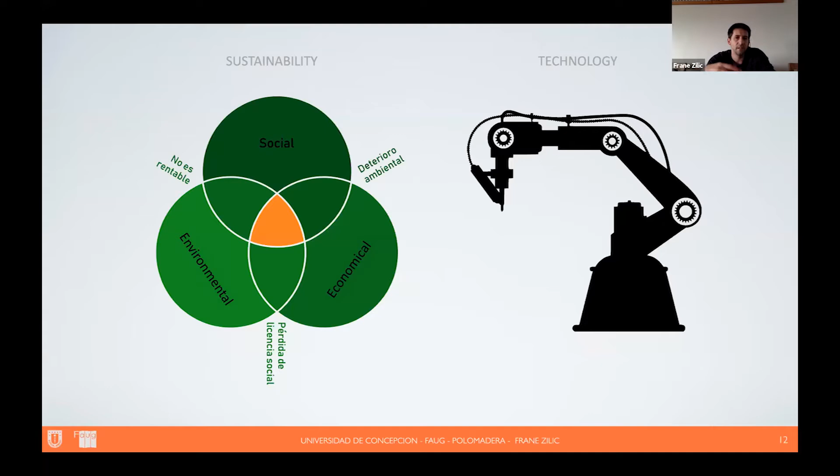Of course, you can find many aspects that are today influencing the architecture project, but I think arguably the most important ones today are sustainability and technology — two strong forces that are shaping how we deal with the project. Sustainability is understood as something that needs to take care of social, environmental, and economical aspects at the same time.

So if we were to analyze construction today by sustainability standards, and if we draw some sort of target, well, construction is not even hitting the target. It's not sustainable by any measure. Whatever you want to choose as a measure of sustainability, construction right now is in big, big trouble.

Just a few facts about construction — this would take a longer presentation, but maybe a few facts: 34% of all garbage generated in the world is from construction. Construction alone is more polluting than mining. Buildings are responsible for 39% of CO2 that is emitted to the air.

We are far more responsible for what is happening than transportation or other industries. And of course, you can apply that to safety, to whatever you want to choose as a measure of sustainability — construction does not hit the target.

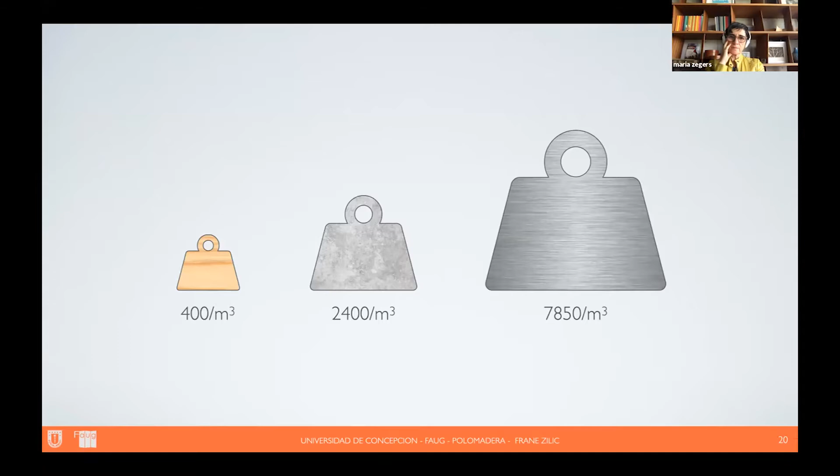That may be due to the fact that it's lighter, so it's easier to transport, easier to machine. But also because it has a strength to weight ratio that is really, really interesting. It's far better than concrete, and it's very similar to steel, depending on the kind of strength you're requiring.

And the type of timber, you can achieve something similar to steel. What is the technological context in which we are moving? In the end, it's about knowing if timber is compatible with that.

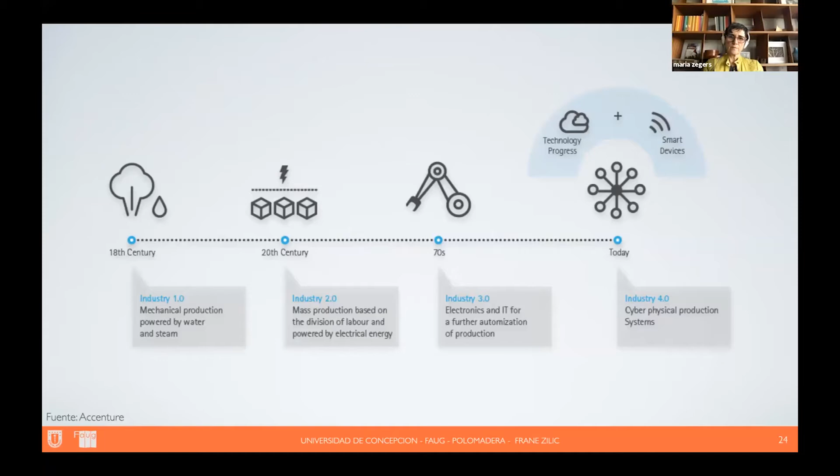When you look at the technological context, you will find a description that involves industrial revolutions. Maybe you've heard of it or not, but we are in the midst of the fourth industrial revolution. The first one was steam, the second was electricity, then electronics, and now we are in cyber-physical systems, part cyber, part physical, and you get this mixture. It's interesting, I think it's something very relevant to architecture.

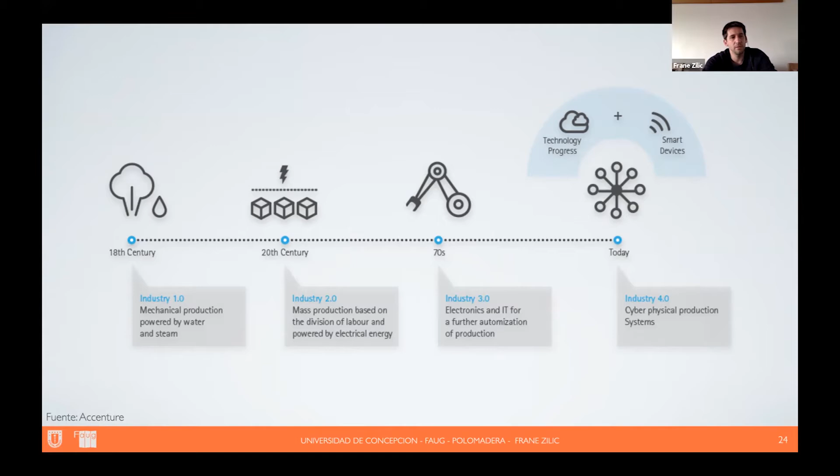Why not? But I think for us, in terms of architecture, there's another classification of revolutions, of understanding how technology is progressing, that is maybe more intuitive: the manufacturing revolutions.

Then you have the first manufacturing revolution, and that is we build a tool. With that diversity of tools you can think of, we can produce different results. So now it's not just the hand. Now we have something that can shape and affect the material, and it has progressed into some absolutely advanced and awesome tools, ones that are available and constructed today with the most advanced machining processes and digital design and whatever you want to include in that.

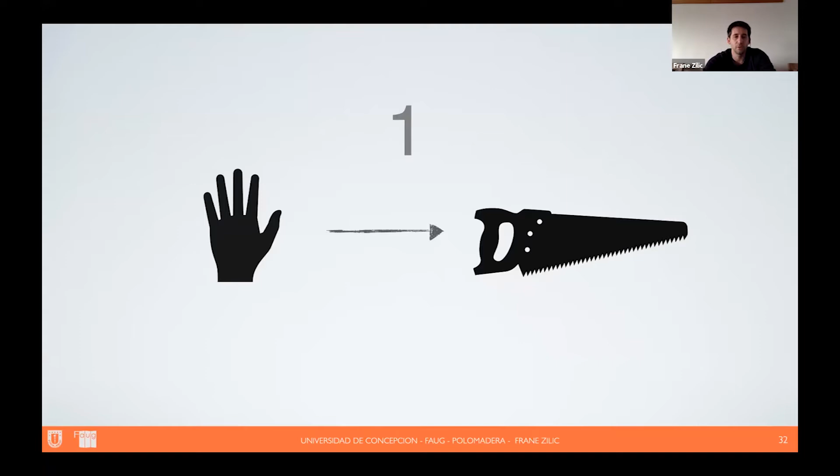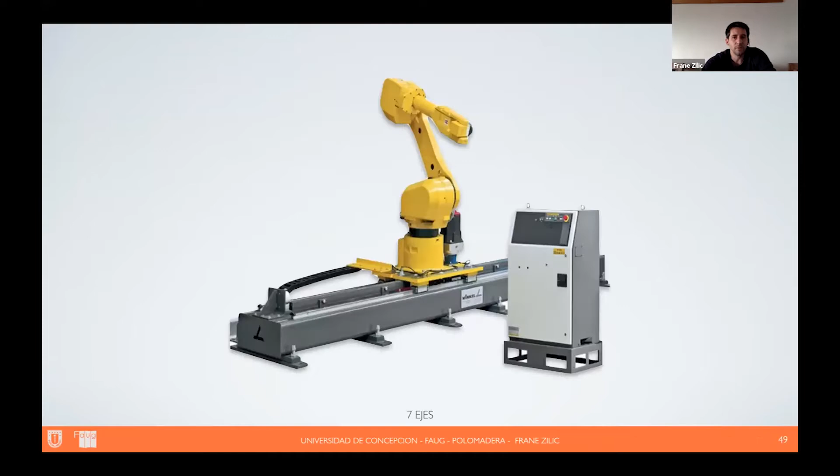This is a 6-axis CNC, then 7-axis, and you can add whatever you want. You can do all sorts of configurations. This is what is present at the ETH in Zurich.

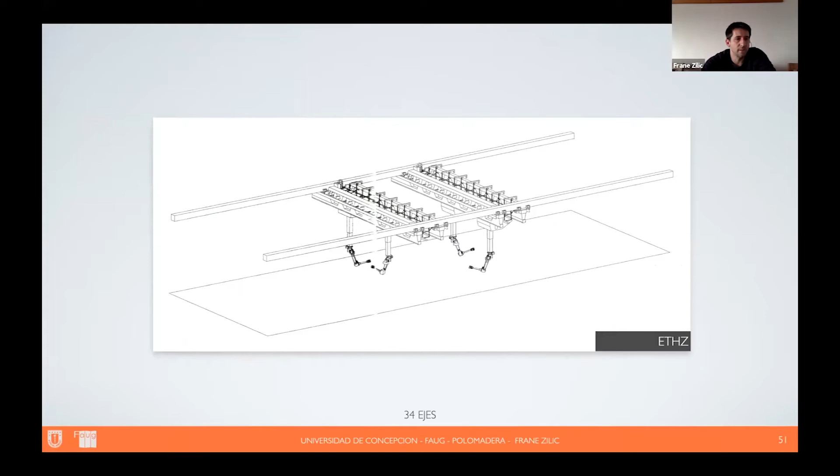Just to understand the system, you have different parts of the CNC. You have a locator, which will find any point, or actually an effector in space, and then an actuator that can do whatever you want. So at the end of it, as an end effector, you can put whatever you want. It doesn't really matter.

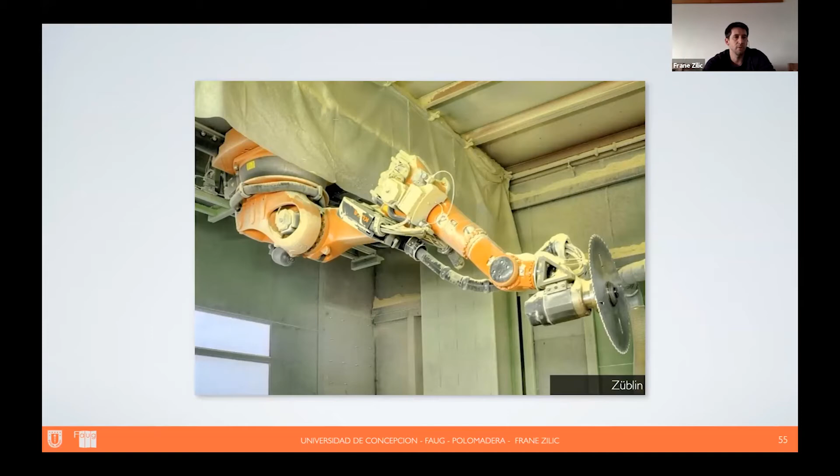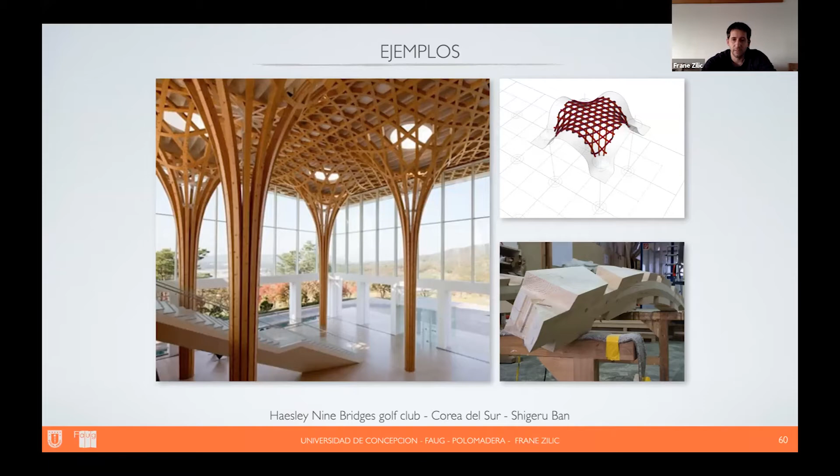And you can produce this kind of architecture. So this is actually very coherent with the technology that is at hand today. In some places in the world, of course, this is not really global. And you can see that this kind of architecture is really what expresses or deals with the most advanced technology available today.

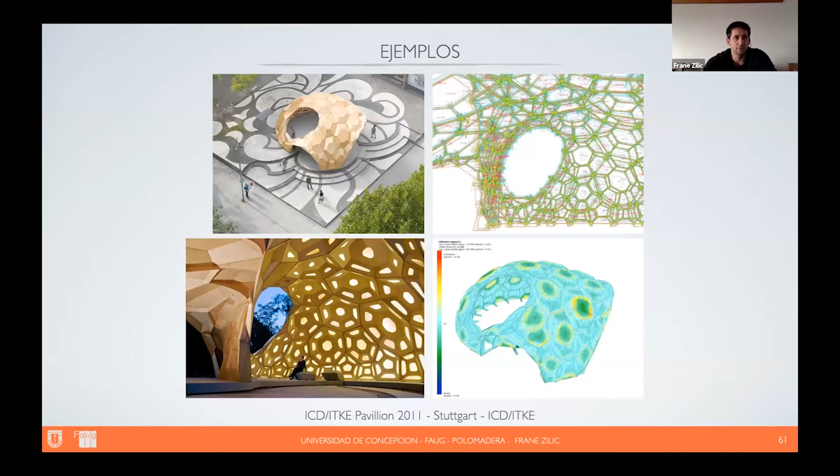These are different examples of very visible complexity, because you just see the different shapes and understand that it is something different. But actually, that kind of technology is also what enables this kind of architecture. So buildings of 10, 14, or 18 stories in timber are not really possible without CNC, without that precision of machining under the millimeter.

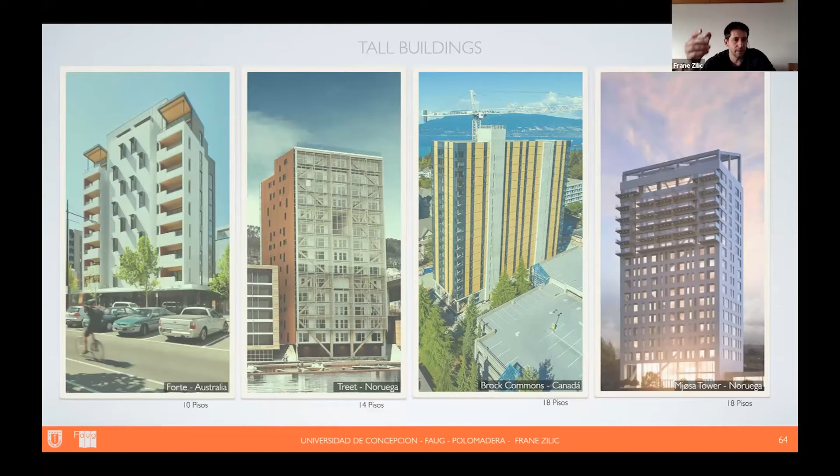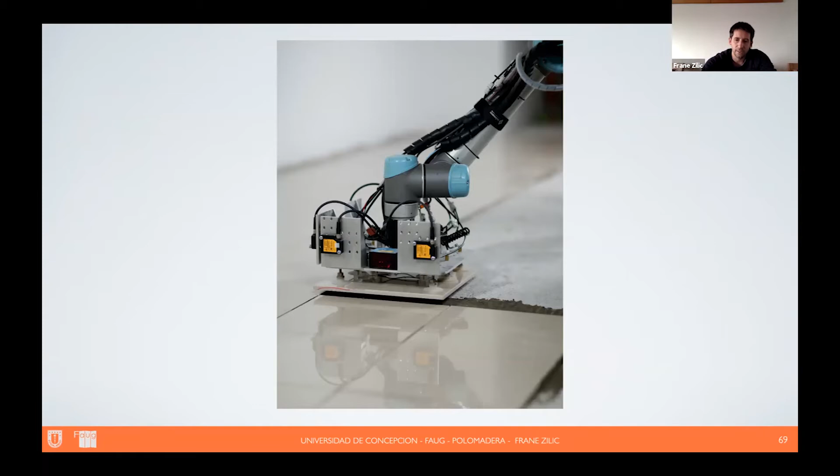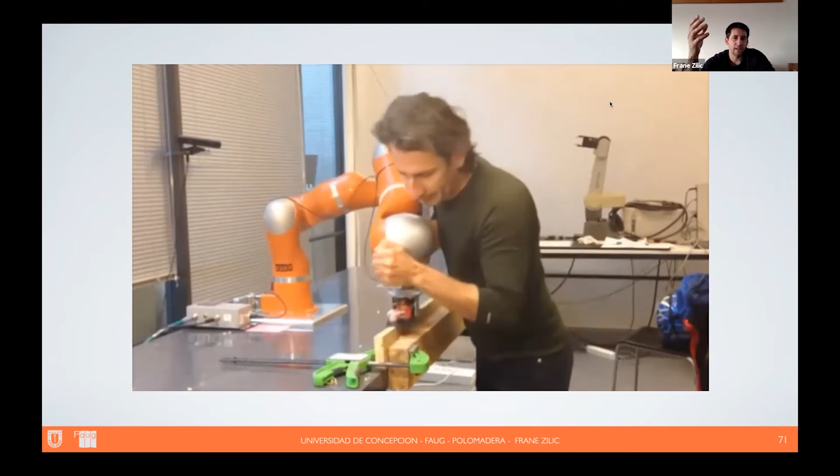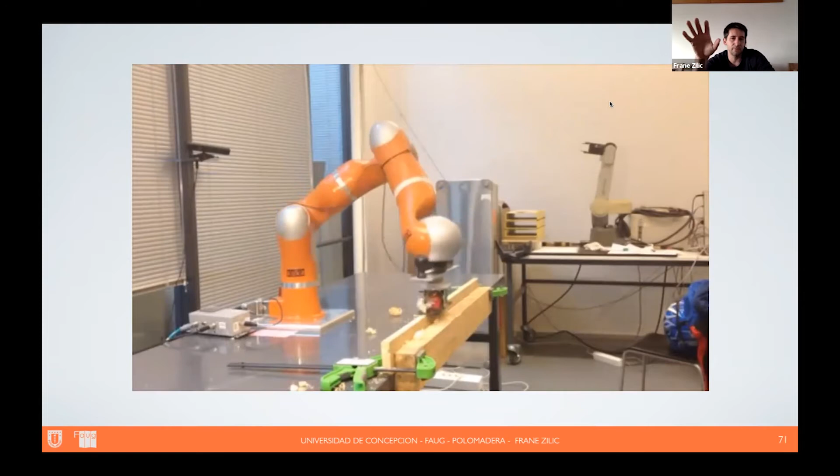And you can pour a beer, or do something like this, which wouldn't be possible without force feedback. So the machine knows how much force to apply. The second time it goes around, it applies the same pressure. It's not just repeating in the void the same motion it was shaping before—it's really a different kind of technology.

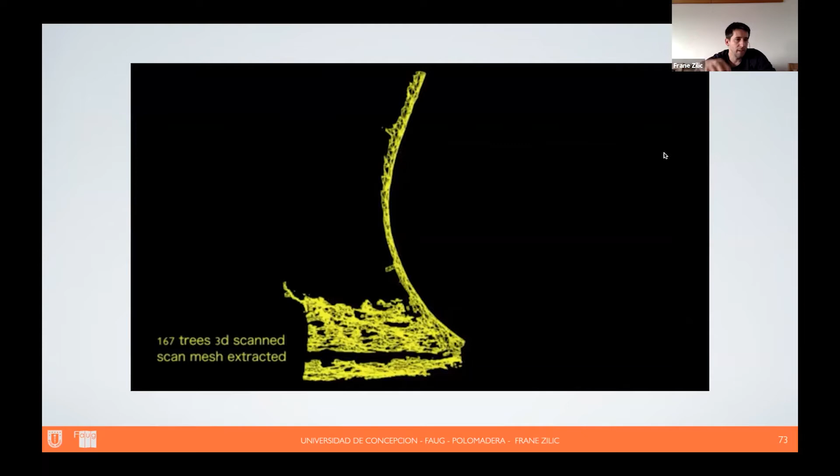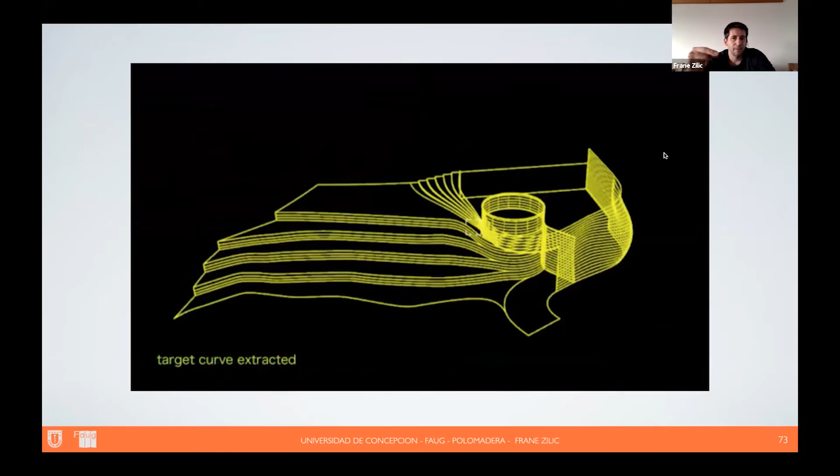In some way, this was also applied in this case at the AA in London, at Hooke Park, where they scanned hundreds of trees—167 trees—and obtained a curve along the axis of each tree, because those trees were growing on a hillside and were bent. So they have these profiles, and they know the geometry they want to achieve. They can feed in the geometry they want, with different sizes of trees, and the algorithm will find the best match to that curve, store it, and continue trying all the different trees needed to eventually achieve that shape.

So you only go and cut the trees you need for that specific curve you're designing. There's a loop—it's not just that I'm designing some shape; there's information coming back as I scan the trees. Of course the process so far is really slow, but there's that loop, and that's part of the fourth revolution, in which our senses are being replaced by external sensors.

And it's hard to understand what kind of architecture comes out of it, because we see different shapes, but we don't see the process that is involved in it.

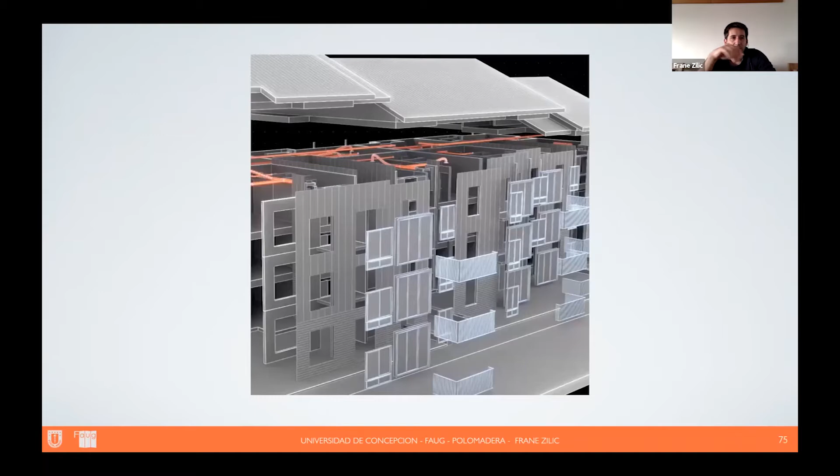I think maybe one of the most advanced or interesting examples is what is happening in the construction industry with companies like Katerra in the US. They are understanding construction as you would understand a car. Actually they're coming from Silicon Valley, and they're applying that vertical integration in the construction sector, dealing with the complexity of the system in a much more efficient way, because they're aligning all the interests of the developers, architects, contractors, everybody, the engineers, the subcontractors, the suppliers, everyone integrated in one chain.

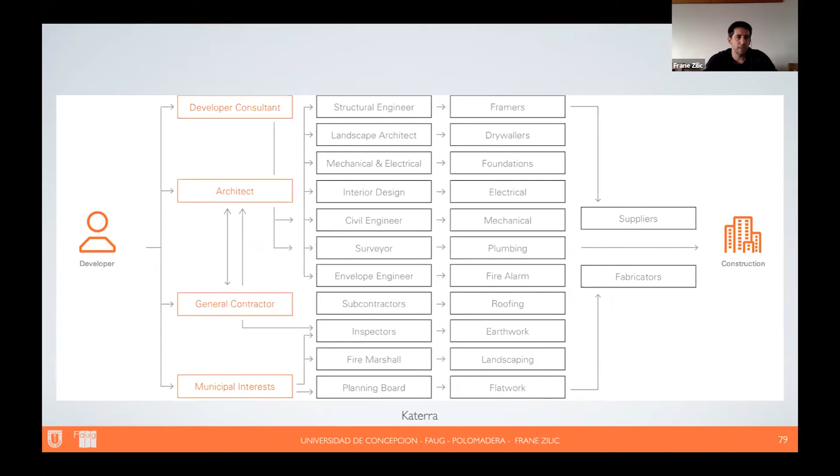And so you just skip the complexity of all the different interests of all the parts that are trying to pull the construction towards their own goals, making the whole process very inefficient. And that is only possible because there is a technology platform that aligns everything. So that is a very hidden consequence of this kind of fourth revolution, that you can deal with complexity in a way that it wasn't before.

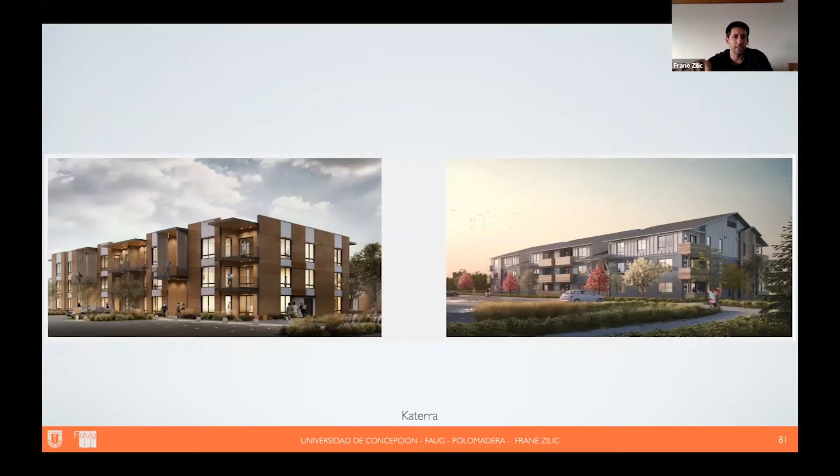You can have a platform in which you can design the building on the right or the building on the left and have the prefabrication done in a matter of a couple of months, and you have a quotation in a week. Even if the designs seem or look very different, it's really the same thing, and the manufacturing process can adapt to that.

And this availability now of these tools, the tools that we have today - so we need to understand what we want to do with it. We want to do a repetition, or we want to achieve a diversity, or even better, we can now understand that the client is a very unique person.

So at least one problem we have here in Chile is that the construction industry deals a lot with repetition of a very huge amount of houses all the same, and how we can use technology to diversify, to understand that the client is somebody that needs to be taken care of individually, is quite a challenge, but it starts to be possible.

So it's moving away from Henry Ford, in which you have only one variation, and you move to something like the Fiat 500 - you can find it in 500,000 combinations. And so this is not industrialized architecture anymore. It's not about that, we moved away from it. We are much more than 100 years away from Henry Ford, and architecture is still looking like this.

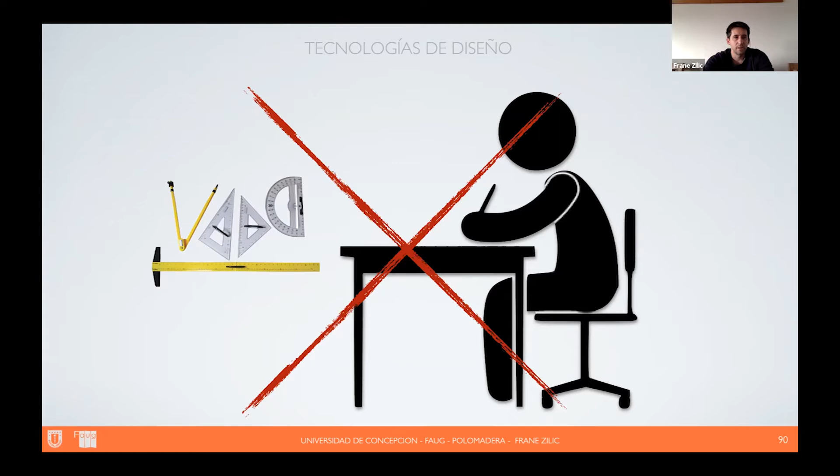So sadly, it's no longer possible to design by hand. Of course, you can have your sketch, you need to have your sketchbook on your desk, but that's not possible by hand, it's not possible by CAD. It's not possible to deal with that complexity with a huge amount of people designing a lot of pieces, all with their own mind and complexity. You need to program, if you want to harness the computational power that is present today in your desktop, then you need to program. That probably today is some sort of graphical language like Grasshopper.

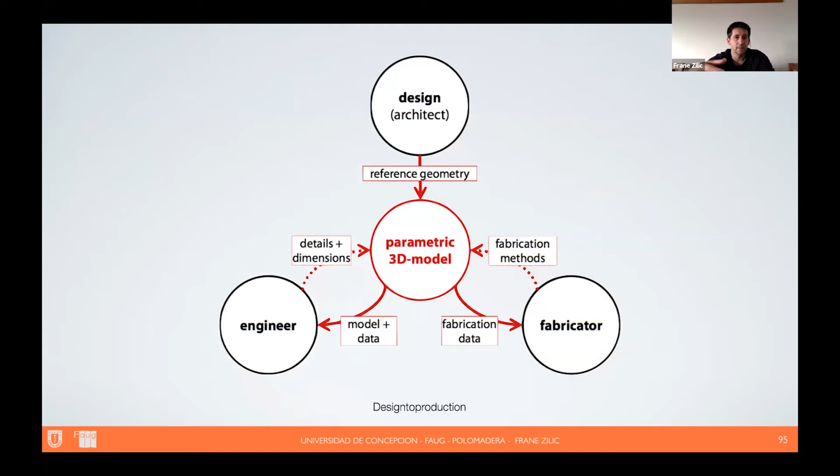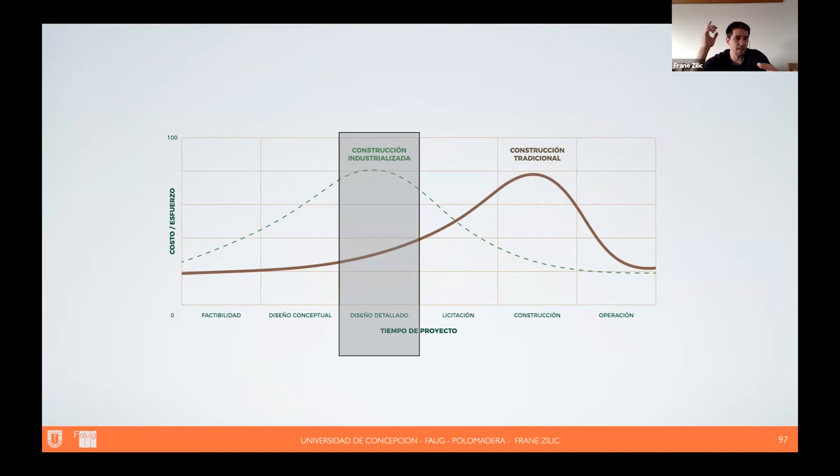And you need to understand how to communicate with engineers, with fabricators, and how you can translate that data. You need to be proficient in that kind of teams, and you will move traditional construction to an industrial construction. It's not that it takes a shorter amount of time, but you can do changes when they really are easy to change. You change in the design phase, not in the construction phase, as it was before.

So you need to understand that 2D drawings are okay, it's a way of representation, but it's not a way to work anymore. You need to move to a detailed 3D model in order to improve construction. Construction is really, really bad.

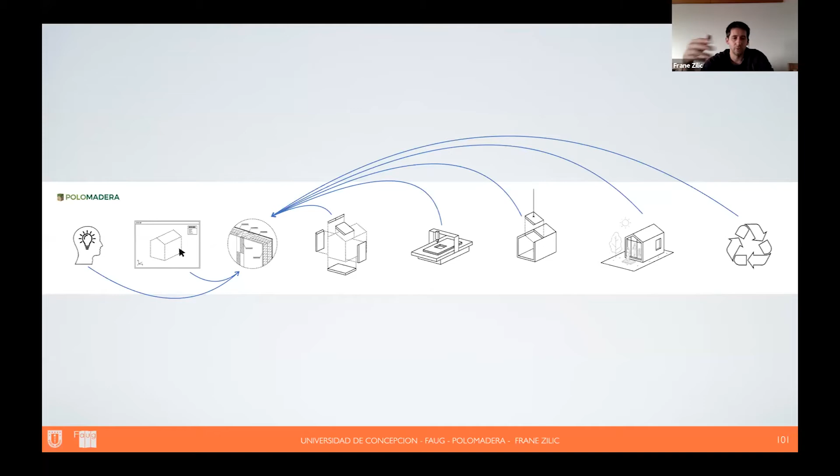That 3D model will have everything detailed, and in order to improve construction, somebody - I don't know who, it will be in a workflow that you will find in the United States - somebody will have to take care of the detailing. That's the most important part, at least to me. I think that is when you will condensate everything: the looks and the aesthetics that you want, the cost, the manufacturing, the building and the use of the building, and then the end of life of the building. Everything comes down to that detail. So if you allow it, then the detail will provide decent work for that building, so that it can function.

So if that is the context, is timber really ready for that advanced manufacturing? Of course we have the highest end of technology, and timber seems a material that is really old. So we need to understand this question in order to answer it.

We have three basic kinds of manufacturing technologies. You have additive technologies, you've heard of 3D printing and that sort of stuff. Well, timber has also had an additive capacity for a long time. We can add different pieces and make a bigger piece that is even better than the smaller parts.

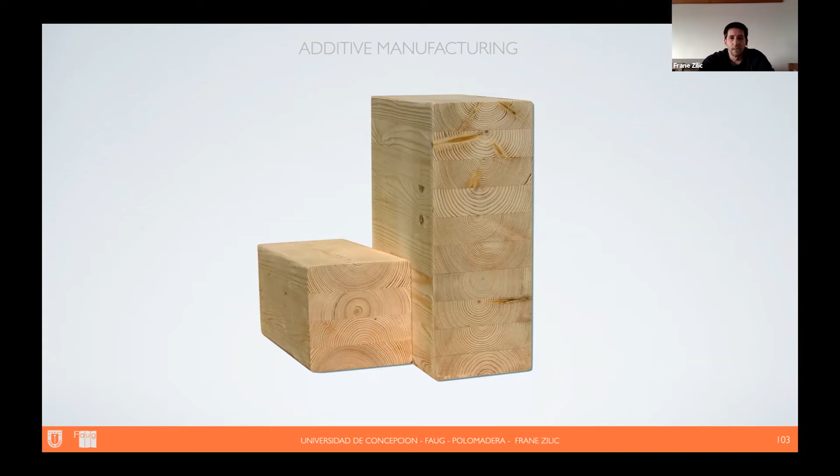You can also have formative manufacturing, which means that you can bend it, so you can do different kinds of shapes. And you can have subtractive manufacturing, and you can mill it to a precision that no other material can, under half a millimeter. I don't know how long that is in inches, but it's really, really precise.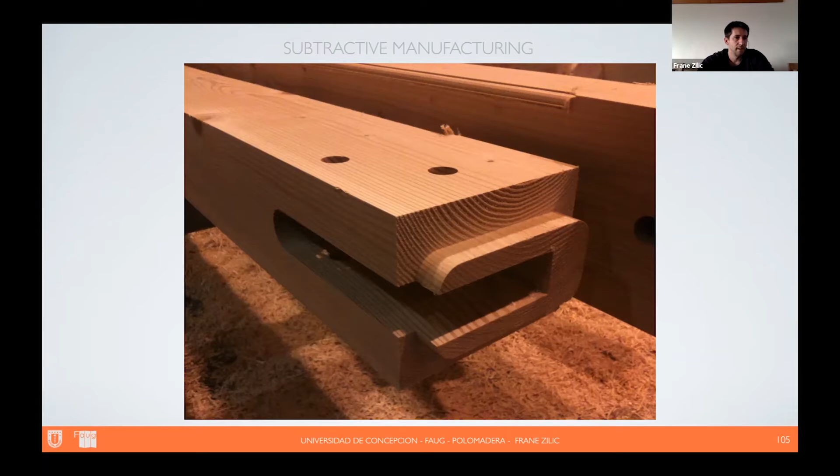There's no way you can do that with concrete or with steel. With steel you can, but then you have thermal expansion that really is a mess. And why timber? Well, because of this, you can work with it. It's really strong, but then you can machine it really easily.

And since it's that soft, you can have very big machines like this one, 2.5 meters long, and the spindle that is spinning at maybe 15,000 RPM, and it should induce a lot of vibration. But since wood is soft, you can get away with it. You can have that kind of manufacturing flexibility with timber that you couldn't have with steel.

Here is an example of what is a 5-axis milling machine for a small piece of steel. You see how robust it needs to be in order to have that level of precision. In timber, it's not really that. It's much easier.

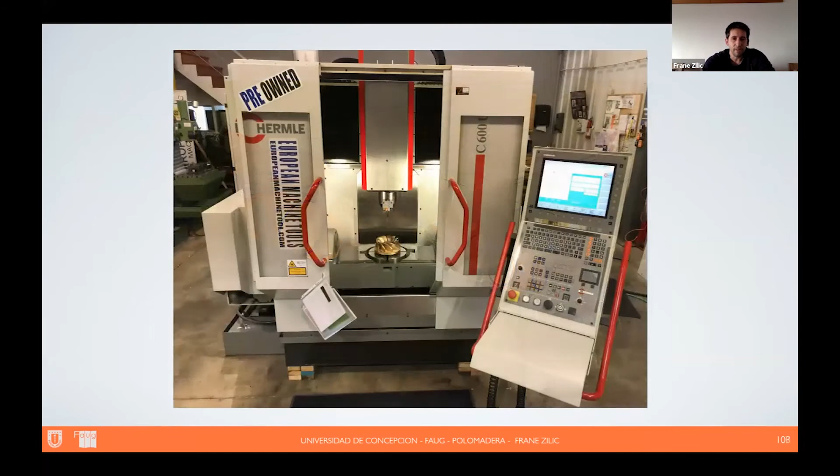And so, yes, robots love timber. It's really compatible, it's the best material for it. And you can do whatever you want with it, whatever shapes you want. You have shells, or you have some sort of ribs, or planar structures.

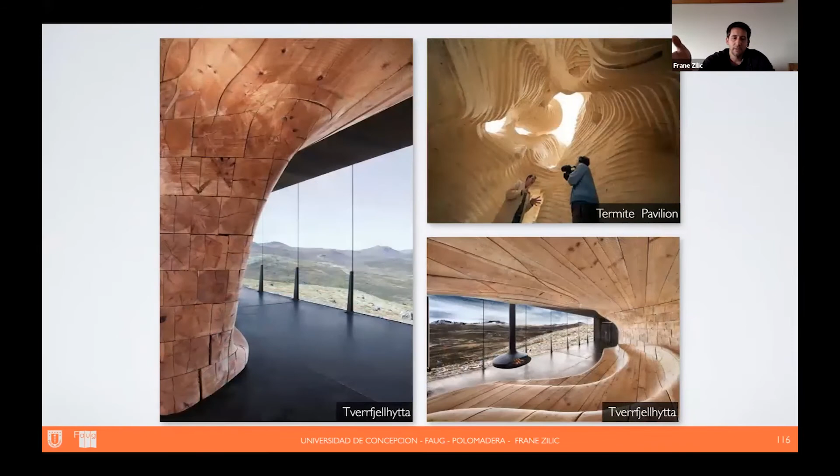You can have grid shells, you can have whatever spatial structures, reciprocal or lamella structures. You can have even solid ones like these that are really sculpted into timber. And again, not just the shiny part of strange and curvy shapes, but also that kind of precision and machining and lightness can allow for this.

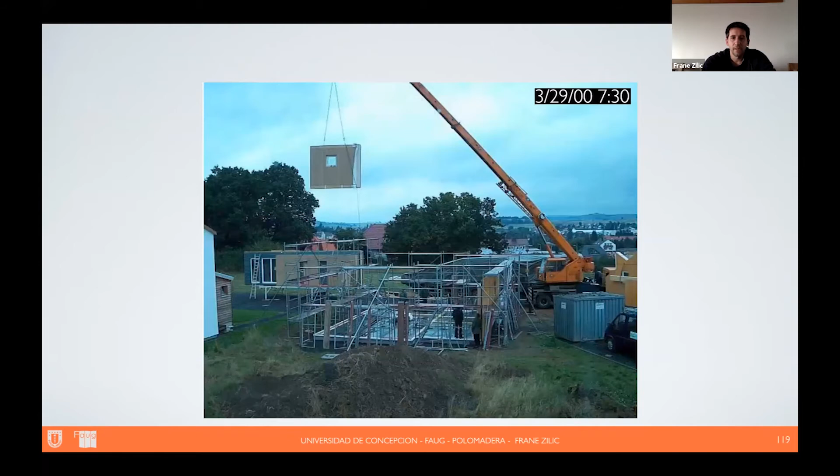This is 7 a.m. in the morning, and this is 8 p.m. the same day.

Of course, the other examples are shiny, but I think this one is very interesting. Good luck doing that with any other material and reducing risks and weight and cost.

So in conclusion, to finish my part, timber is actually very compatible with technology, but also with the world, with what we need as a response to a sustainable construction. Of course, we need to understand much more than we usually do in architecture. We need to understand the material, the construction processes, a little bit of engineering, and then you can do amazing stuff.

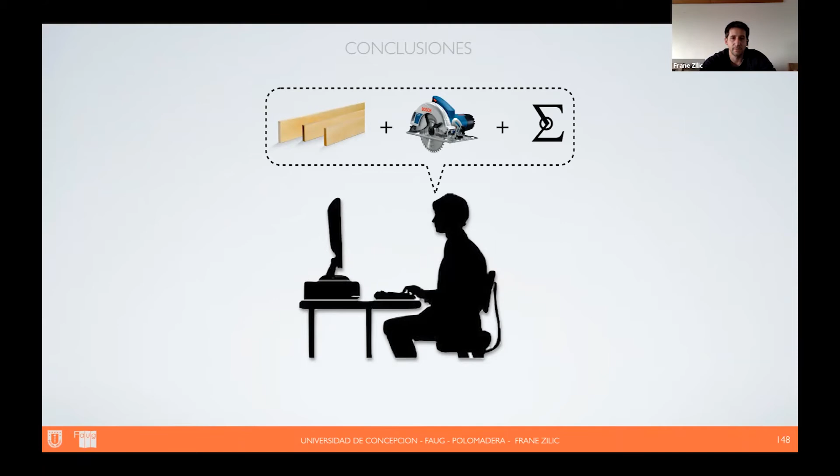You need to understand how to collaborate and to integrate today to deal with that kind of information, and how to be compatible with what is needed for a complex solution to a complex problem.

Gracias. That one I didn't translate. I think you're going to understand.

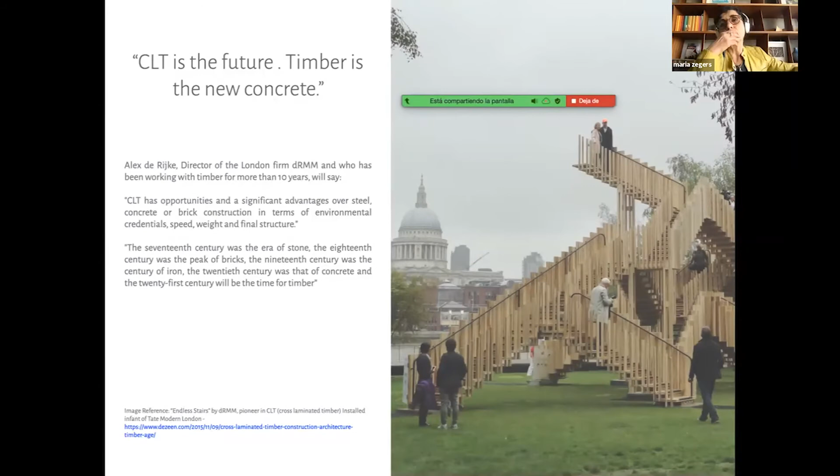And the reason for that, as Frane was saying, is all these environmental things. And this is another exploration that Michael Green, with Equilibrium Consulting and Metsawood, did, exploring if the big buildings of the 20th century could have been done in another material, because each material has its architects, its iconic architecture, no?

It's really interesting to have these super interesting buildings like the Empire State, as if it could have been done in wood or in timber. He makes all this exploration, and it's really fascinating that we can make this icon in other materials like timber, that in our minds we would think was really impossible.

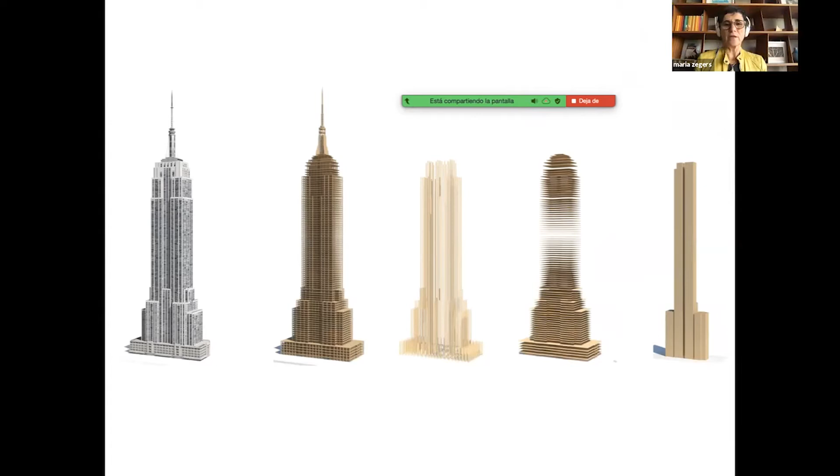And then I met this architect, Andrew Waugh. He's also an English architect, and he has been working with timber for a long time. I met him in 2018 in Brazil, at a conference for building with timber. I learned a lot from him, and he says timber is the future, as everybody does.

He has this project called Multiply, which was a competition entry for the Victoria and Albert Museum. It's beautiful to see this timber piece in this really traditional architecture, and he explains the possibilities that timber gives—the main ambition of the project is the policy debate about environmental challenges that can be addressed through innovative and affordable construction.

We're in a time of great crisis, both in terms of housing and CO2 emissions. We believe that building with versatile and sustainable materials such as American tulip wood constitutes an important contribution to solving these problems. This is Andrew Waugh's position, and it's something we are trying to put on top of this discussion today.

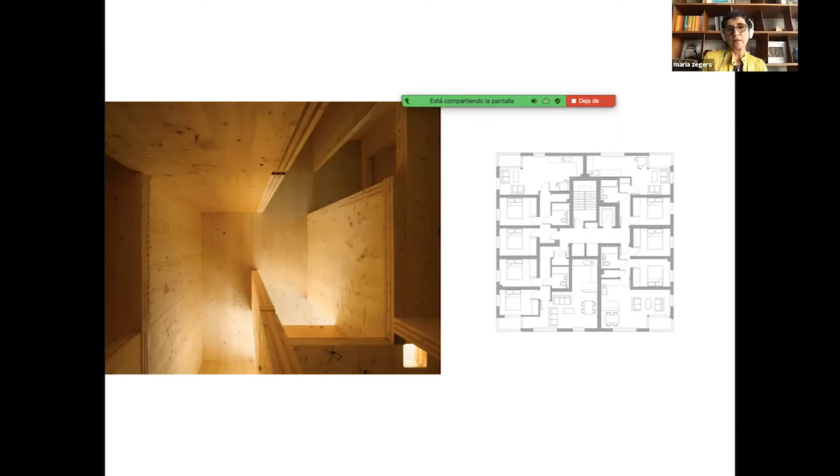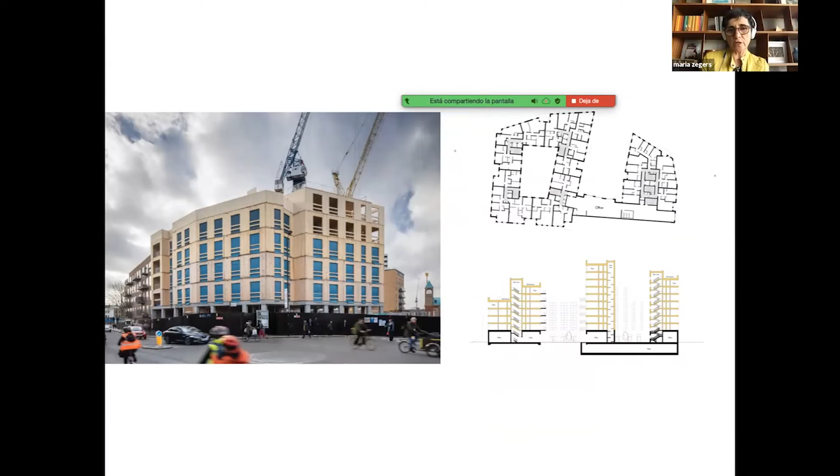And his house, where he made a really interesting challenge to the structural capabilities of the material, by making that space for work in a double space with no beams. He explains it better than me, but the interesting thing is that when you want to investigate with a material, you start pulling the limits to new solutions, and that's what I think is really interesting.

That's what we've been doing with Thorsten for this competition, which we hope we're going to win—I think that we should. You see this double space, which is open and doesn't have any beam, and the building is really beautiful. It's his house; on top are houses, and on the bottom there are little stores.

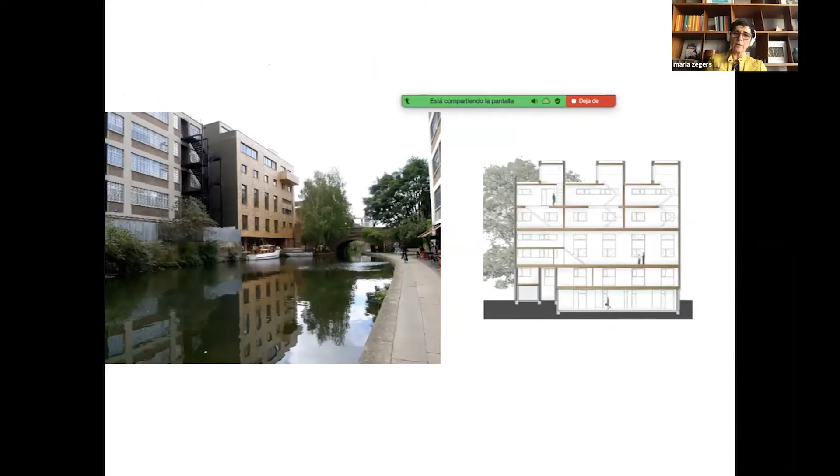This is on one of the canals in London. There is Andrew Waugh, when I met him in Brazil, and then we worked together on a competition. There's Frane too, and Francesca, an Italian architect who works with us, and also a German architect. So we were a multidisciplinary, multi-nations team, and this was our project, which was really beautiful.

It was a whole timber project for a new timber headquarters, and all these roofs were for walking on top of them, connecting with the hills around. We really made an open plaza for the community, and all the spaces for working had greenery—it was like a very discrete project. It was very interesting to do this.

And then what happens with Latin America was our question. We are still in Latin America at a very initial stage of this, and with Frane we're trying to pull these limits towards a new dimension. He's making the first tall building in Chile, which has been a very big challenge, because as countries that are underdeveloped we have to be very creative, as Andrew Waugh was proposing—to use high technology but in a very low tech way.

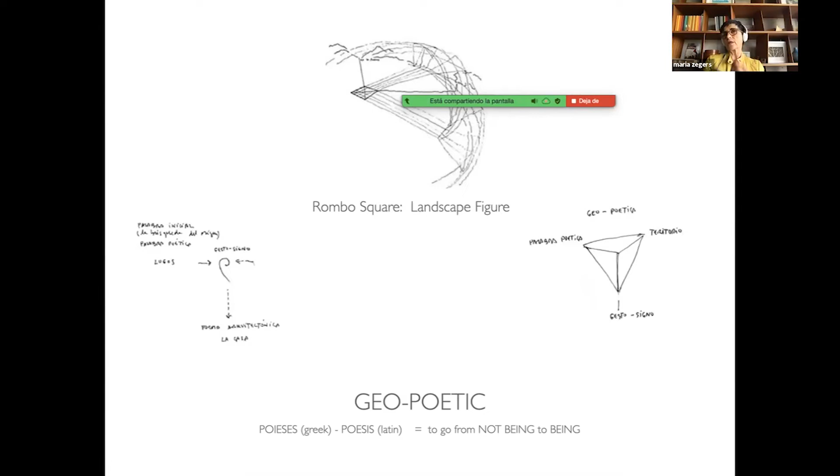So in this way, you can build new narratives over a territory.

I want to start with this family lot, which was designed in 1995. I like to show this because a family lot is like a small hotel for a family, but it has all the same way of doing things.

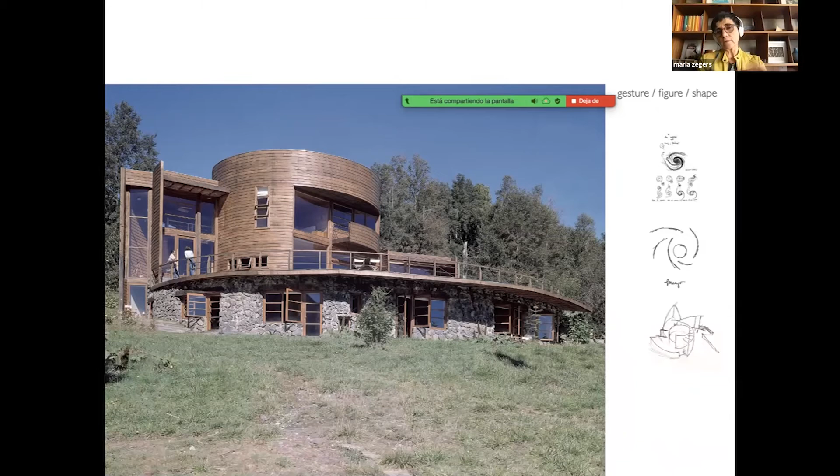I did this in the south part of Chile, in a very remote place. I decided to go round because of the poetic word, which was fire. Fire, because the place where I put this house had very recent volcanic explosions, so I thought fire was very present there. Also, like a family lot, the first order was the clan over the fire. So I thought of the family over the fire, and then the house came because of this relation.

I'm always interested in architecture that's not gravitational, but dynamic. So I thought about studying the spiral galaxy, that is the drawing of the gesture on top, and then that figure became the form.

It's really interesting because if you look at these studies of the spiral galaxy, there are little galaxies there, which is the way the nursery of galaxies starts. I did this project in 1995, and construction was finished in '97. I just made an upgrade in this same way.

What's interesting about this project is that because of the poetic word, I had to make this house really round, completely round. Everybody in Chile was telling me it's impossible to bend timber that way because all this native timber is very, very strong. So that's impossible. But I thought that when you have an idea, you can always make things go forward. So that's what happened with this house.

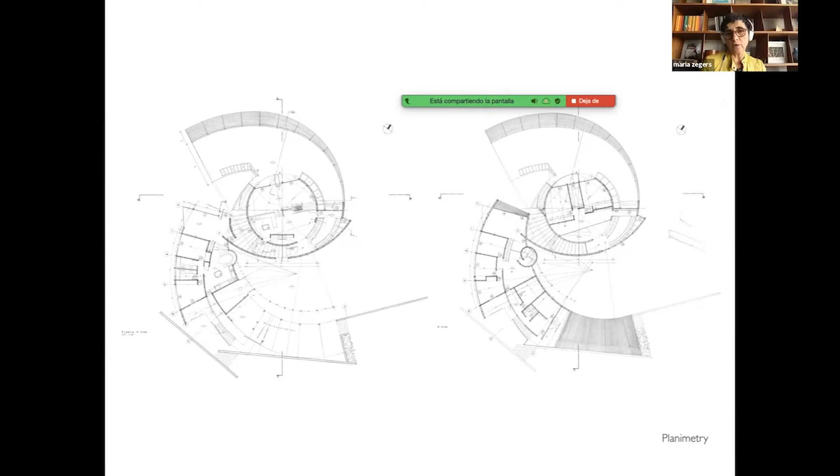In the center you have the fireplace for the family, and in the first wing you have all the couples' rooms, which can be accessed individually or through the common space. On the left wing you have what was called the children's house. So there are two houses articulated by this center.

The way we built it was with this very precarious and uncommon light timber structure. What was really interesting was that I was trying to find how to put the stone for the wall, for the concrete wall that was the support of all this.

When we were making the hole for putting in the base, we found a lot of volcanic stone right there. So that was like the confirmation of all my hypotheses with the poetic word.

Here is where you have the articulation of the two wings. I call this the wind, or the wave, that connects both spaces. You can see the entrance of the second house, and also a covered place to put wood and everything for use of the house.

I also always love stairs as sculpture, so it's always an opportunity to do a sculpture in the house. That stair was built in Santiago. It is laminated, and it was completed and sent in one piece to the place.

As I said, it's in a really remote place with a really bad road. So using all this creativity, they put this long stair on a truck with pneumatics, so it wouldn't break. So it's a lot of these little stories, you know.

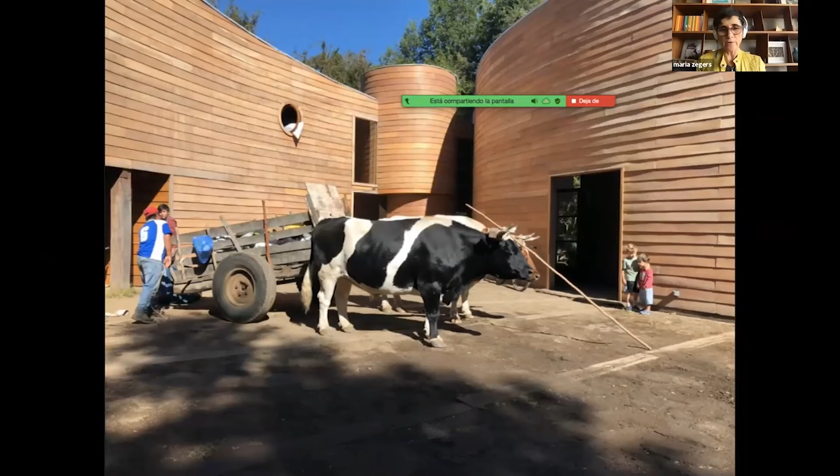And then the stairs that are connecting all these parts over the center. And then the windows on the roof that bring light into the interior spaces and also give you these vertical dimensions. And of course, this is the garbage truck in the morning. So you have this very contemporary architecture in contrast with a very vernacular way of living in the space.

And this is the new version of this project, where I did all these terraces and a second layer of using the space. On the right hand, you have the new gallery coming out, and it is a fireplace for the family again, because the family grew a lot, so they needed a bigger space. So this is the place today: on the left hand is where everybody is meeting and gathering.

And here you have the round cylinder from outside that is the connection, and it is also a bathroom inside. That's the entrance. And here's the new kitchen for the space. The afternoon.

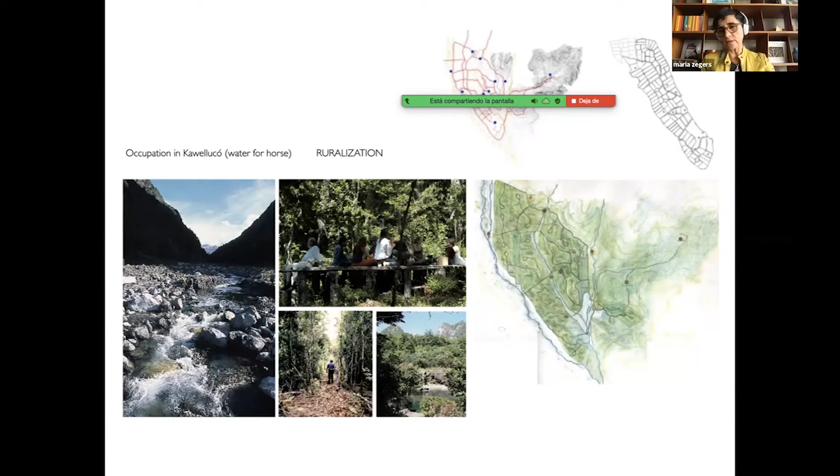And of course, I had to work on this — this is the porter's lodge. This was just an encounter of roads, but because I made that really simple structure there, I made the entrance and gave the place its shape. It's inspired by the eye of the Portes Lodge, who is coming to the place.

And it's just this wall that is ascending towards the sky, and it is connected in two parts — this is the eye of the porter's lodge. And then there was this typical barn. We have German colonies in the south part of Chile that were called by the government in the 19th century to open and colonize these lands.

And they brought all this way of doing carpentry from Germany. They were really very beautiful and good carpenters, and they taught the local people.

So there is a very iconic construction in the south. There are all these barns. So we used this barn.

I decided to leave it just as it was, and made a space for receiving the people that came to buy. Because I didn't want to over design, I just left the clean structure and made the space work to receive people. Like on the second floor, we put all these beds in an open space, which is a very indigenous way of sharing.

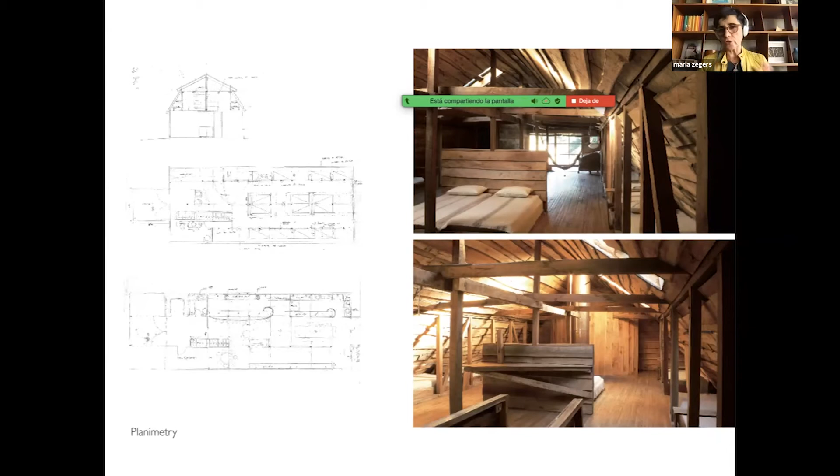And all this experience of the barn made the people that came here be invited to the place to live this experience. Because what happens when you don't over design is that you have a beautiful table, but it's not completely set up - but the setting is beautiful, delicious food, and the person is in front of you. So you have to cut all your barriers, and you just have to talk and encounter the other one.

So all the speaking that happened in this place was what made the place to be, and to develop also the architecture. So today, this firehouse is the place for the community and to do sport.

We climb the volcanoes around the space. This is us going to Mocho-Choshuenco, which is this beautiful country that we have. So this experience of the Fogón and the Casa Fogón also was what gave the architecture, as I was saying.

So I developed like 3 types of architecture. One is the galoft, which is the encounter of the galpón, which is the Chilean barn, and the loft, the American loft too. So it's a way of how you organize the program of the house in open spaces, in this vernacular contemporary architecture.

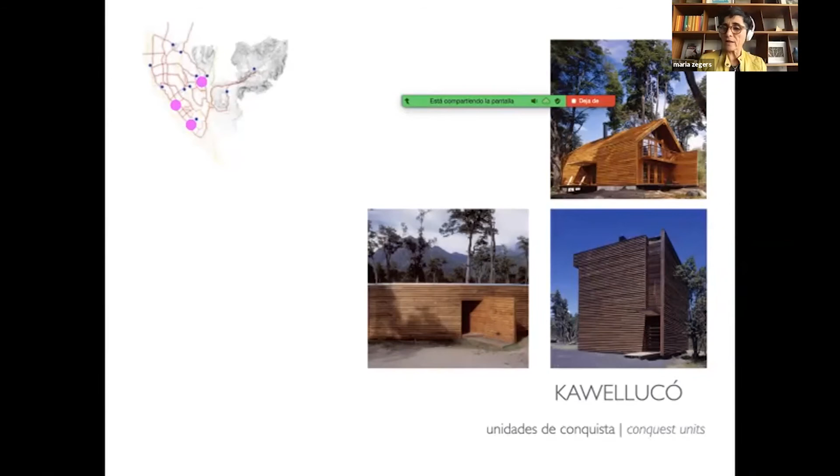I'll show, I think I have 2 of these, and this is the barn house, but this is a contemporary barn that Philip Jodidio chose as the Forest Hideaway in his last publication, Latin American Living. And it's just this fuselage of timber in the middle of the forest.

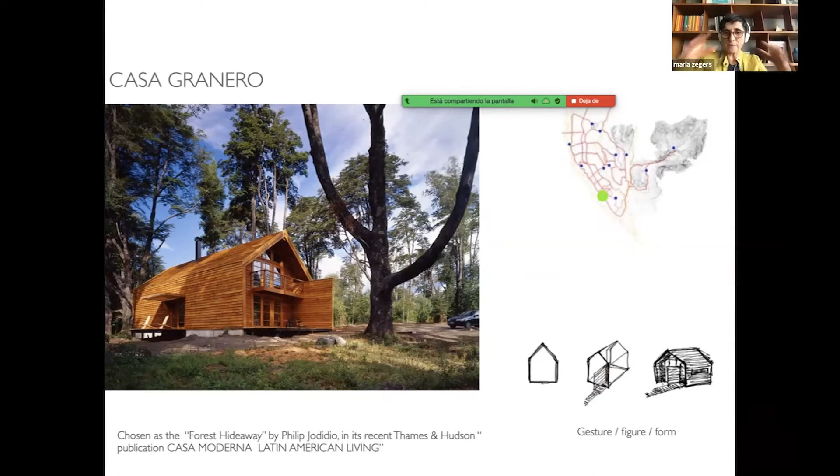And it's inspired by this - when you draw a house as a child, it's just this synthetic space that is like this tent that is protecting you. And I made this wall, which makes the entrance, also controls the climate, because you have these 2 doors, and then you go into this open space.

On the top, you have the balcony for the family. And also my original idea was that this solar protection would also be the fence for closing the house.

This is the main room, and the way the house is in the forest, with very simple movements - you articulate on one edge and go in with the wall for 1 meter, and then you have a lot of quality in the facade.

Then there were these atelier houses. This was for a Chilean painter who lived in France, and he wanted to paint, made big size paintings. So he needed a special light that came from the south, which also had the volcano view.

So that was perfect. And he asked me for a cube 9 by 9, which I suspended 40 centimeters, and I opened the edges to make the light come in. This simple cube is 9 by 9 by 9 meters.

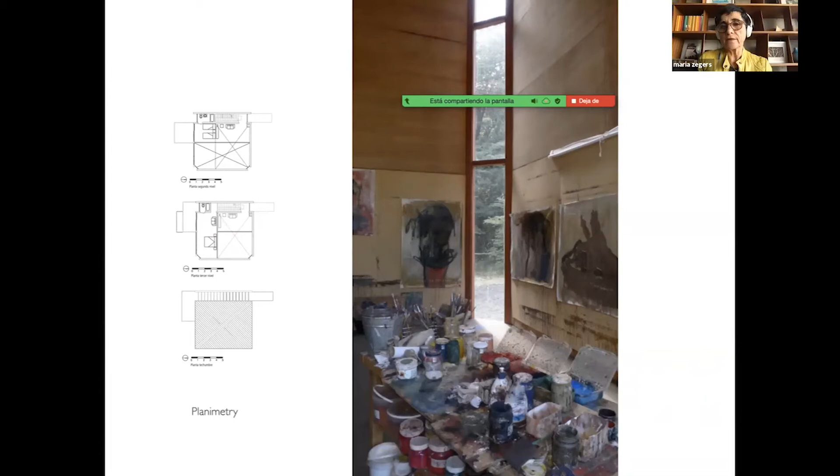I moved the wall like 2 meters, so you can have the stairs for the balconies where you have the place for the living. And sometimes you have the cube as an atelier, and other times it was the space for the family. So on the right hand, you have the kitchen and the table, and the volcano on the front.

And also this is an interesting picture, because these are the balconies for sleeping with the bathrooms. And you can see a very complex space, but it's really simple. So I like this idea that in very elemental movements, you can have so much beautiful experience in the space.

And here one of the lights in the roof is also the place where you take the water out of the roof. But because I did it with glass, it gave also a lot of - how do you say in English?

And then I call it the shell house, which is inspired by the shell of an apple - like you peel an apple and it's what is left.

And the beauty of this is the tension between the landscape - the hills made by the volcanic explosions of the volcano, and that's where the park is, that's why they couldn't cut all the trees. And this simple horizontal line tensions the space, so the landscape tensions the house, and the house tensions the landscape.

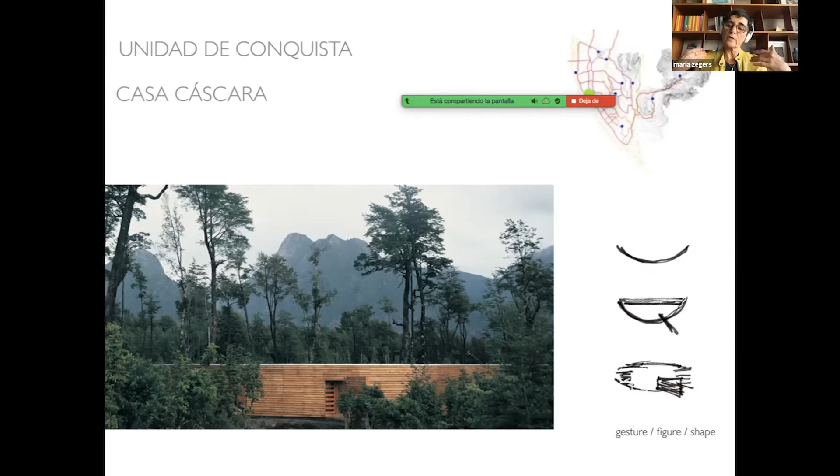And this wall is vanishing over the ends, because I have the light coming from the facade that you go in. I didn't want to cut that facade, so I made a very simple movement that vanishes towards the end and lets the light in.

Again, this strategy of the wall, making the entrance and protecting from the rain. This is the system, a 2 by 1 inches piece of wood that connects with the timber every 1 meter, giving you continuity of the wall.

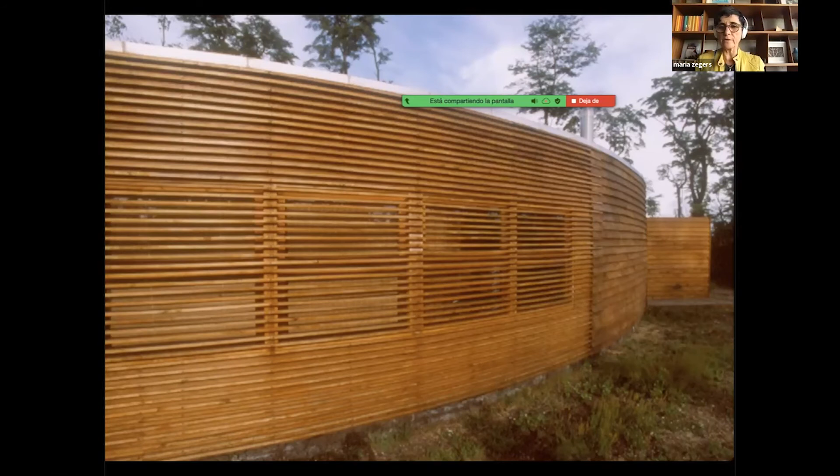And on the inside, you have this really qualified light. I'd like you to see the floor plan, which is very simple.

Now you have all this common space. On the right you have the main room, and on the left you have the 2 rooms and a bathroom. This is 100 square meters - very small, but completely good for a family to be in the space.

And also the roof has terraces. Then you have the space and the chimney - you can cover it from one side or the other. When there's only 1 or 2 people in the house, the chimney is open completely, and if you want privacy, you close it. And there's the way the wall vanishes towards the end, with these little creations of the pillars with the glass inside.

So everything is speaking about this lightness of the timber. And I did the same floor plan, but in a rectangular house.

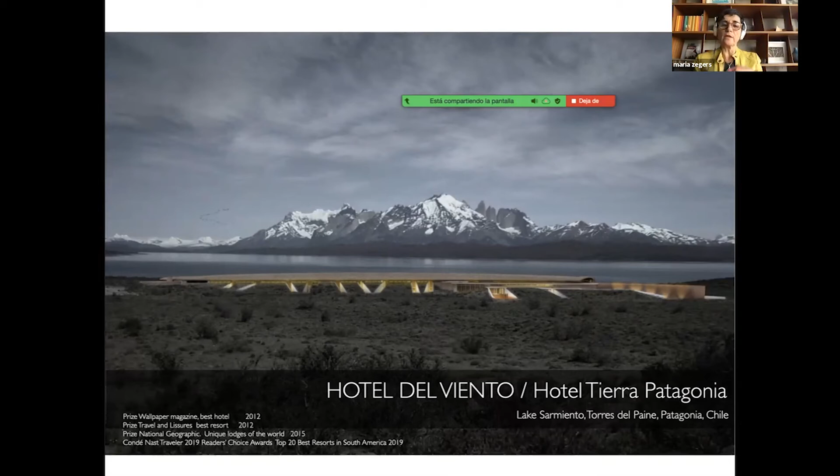So I thought the hotel was going to be one of those dunes - completely topographic, not interfering with this beauty, but still being there. So I made this fuselage that comes out from the earth and folds in itself, and by doing that, it also gives a front to the wind.

And what I imagine for the hotel, because people come here to do all these trekkings and to visit this beautiful place, so they are in general here in the morning and in the evening. So I thought that the hotel was the heart of a big man, like floating over this space, and the heart was the hotel.

So the hotel has to be a very thin shell that you could always be in the environment but protected. So that was the big challenge, how to make this fuselage that you can also be sharing the space in connection, not disconnected. So there is the drawing of this man over the territory, or this territorial man.

And then of course there is the idea of the wind coming and bumping onto the building and jumping back, so when you went in the wind season you could go in without flying away. And the poetic name of the hotel is the Hotel of the Wind, of course.

And the other idea was, I said, yeah, what is the postcard? And the postcard was like this fossil that was over the shore of Sarmiento's Lake.

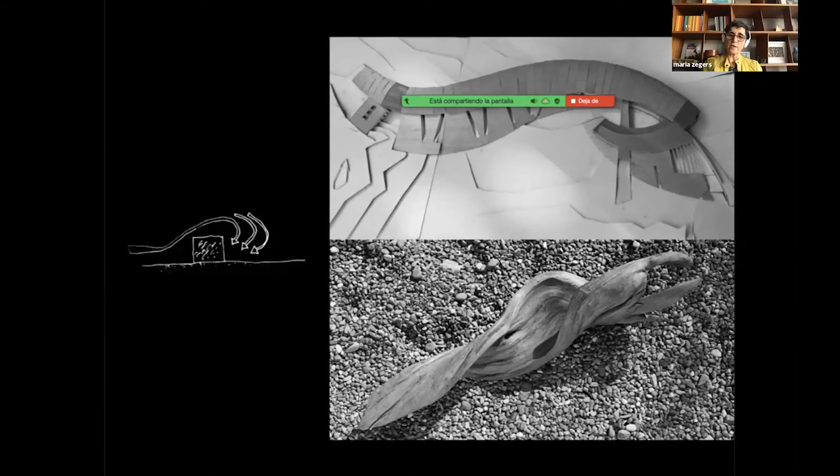But this hotel couldn't be built and resolved if we didn't design it with parametric design, as Frane was saying. In the very beginning of my career, I did a roof with no parametric design, and it didn't work, I have to say. And now, if we hadn't had parametric design, I think it would have been impossible to do this shape really.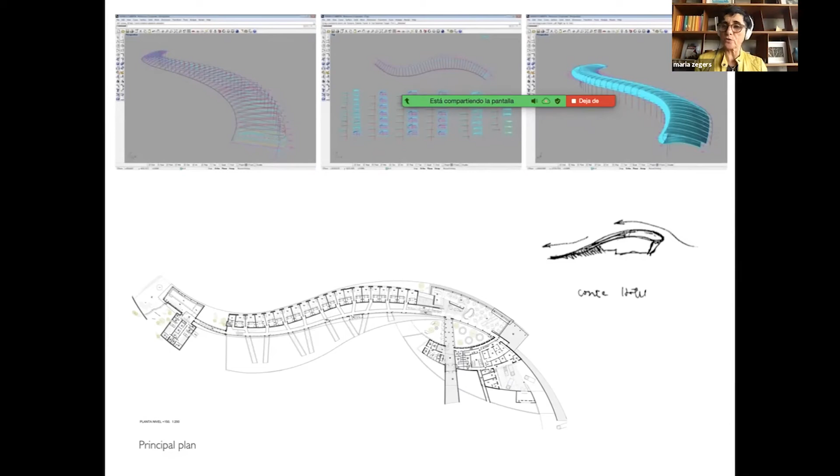So it was solved in a high-tech drawing, but in a low-tech solution. All the work is bringing all these beams on top, and each one is done by hand, one by one, in the place. And these beams are what give all the space its shape.

And then you can see the building sitting there over the shore. And it's almost camouflaged with the space.

The other important thing we did is that when we were making the buildings, we took all this vegetation that takes a long time to grow and put it in a green garden for all the construction time. And then when it was ready, we planted it back. So the building is completely settled into the landscape.

And also those openings are windows that are connecting the circulations with the outside. This is the facade to the lake, the different hours of the day. It is a really beautiful landscape, and the skies are all the time changing.

And then you can see the building coming from the inside to the outside, dialoguing with the Torres del Paine massif. And for me, this is like a love affair between architecture and nature, like the way that they melt in and they fold and they dialogue. It's amazing, really.

So I will just show this in a very fast way. And using timber again in all the ways that you can imagine, we use lenga for this. That was a local timber from there, used by a forest that is harvested and not cut, no?

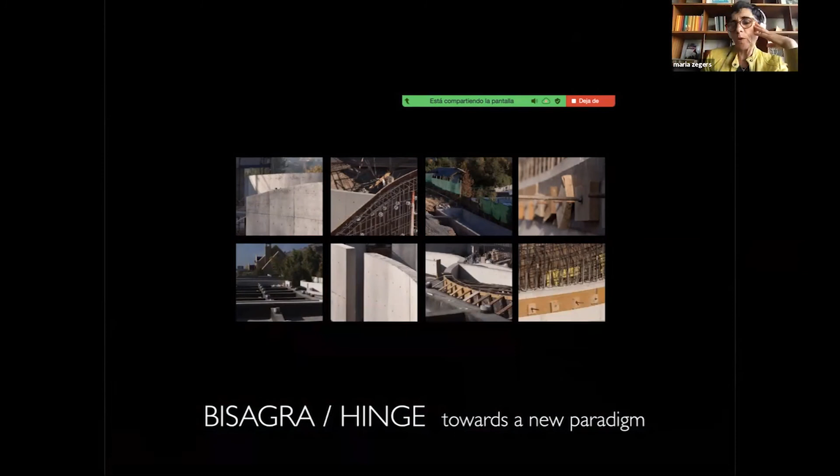And then I moved to another new paradigm, like changing this vernacular way. This is Santiago. And I made my mother's house here, which is called the Emerald House. I made it almost entirely in timber.

But again, as with Casa del Fuego, I'm still breaking paradigms, because everybody says that a timber house in Santiago is not good because we have a very dry climate. Even my mother's neighbor, in this nice neighborhood, said, 'You're bringing the neighborhood down because you're making a timber house. Why are you doing that?' He couldn't understand the architecture in timber.

I think that's the challenge for timber as the material of the 21st century, to break this idea that timber is precarious, or that precarious is bad, that it's poor. But I really think that precarious is virtuous, and this is the way we are showing and working with that.

So the Emerald House is named for the color of my mom's eyes, and I worked with this Roman floor plan with a yard at the center that gives light and air to the space. The beauty of this is that it's in a really beautiful place, so I wanted to have the view in all 360 degrees. So I didn't put any wall toward the window, only sliding doors.

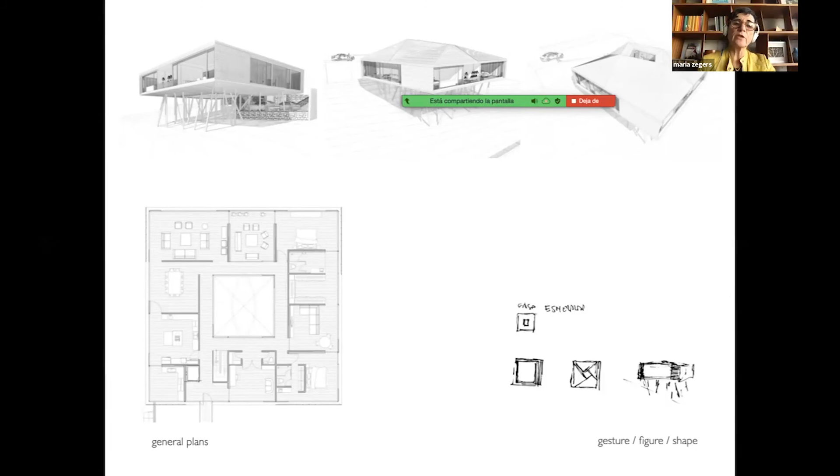This makes the space very interesting, because instead of having partitions, you have areas, and depending on how you close or open the doors, you can use the same space in very different ways, which is very interesting. And what I did was study the way the emerald crystal grows in platonic forms.

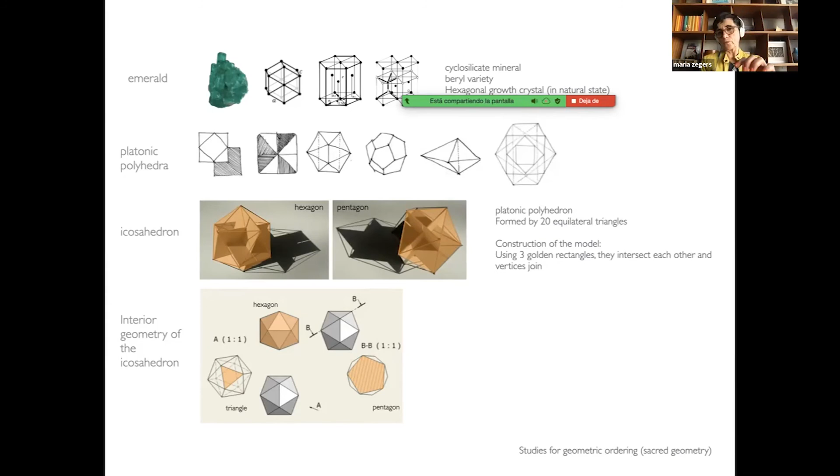We got into the icosahedron, and because of that we thought the yard had to move towards contemporary. So here is the yard moving towards contemporary from this regular basis of the Roman floor plan, also volumetrized. And this is the roof of the house.

From here you have all the space. Also, because we are on a slope, I put the whole house on concrete columns, so you have a lot of space under the house, like a Mediterranean or intermediate space, which is very good because we are a lot of people in our family. My mother can live alone, but we can also all go together, like 42 people at the same time, because we have all this space to expand.

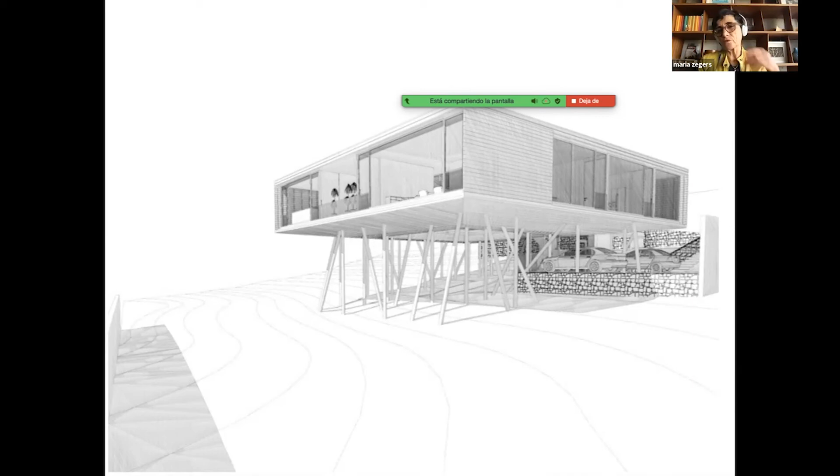And this is the construction process: concrete for the base, then steel, then all the materials, and then this timber cover. This is Santiago, and we have this amazing landscape with the Andes in front.

This is the concrete coming out, and the space underneath the house, and then the emerald coming out. And this shows how, even though it's a very urban house, it is still dialoguing with the landscape.

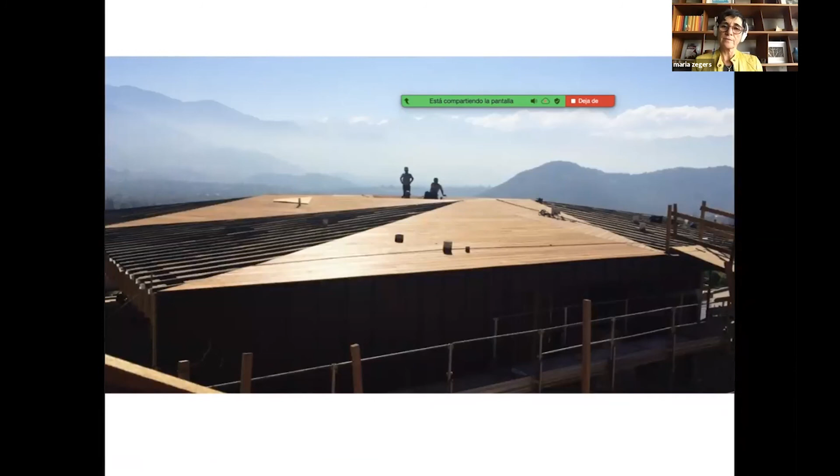Again, the stairs as the sculpture for the architecture, and the concrete beams, and the space underneath. And it's really a beautiful house.

And which is really amazing is that my mother decided to build this house when she was 78. Somebody told me that old people don't feel very comfortable when they move too much. So how I did this house was measuring all the furniture and the way that she was living, and making her relations in space, and brought it to the house. The house she lived in before was a first floor apartment, so this thing about putting the house on top of this concrete is like an apartment, but it's also the green part down.

And then I'm all the time inventing interiors, like this glass pressed glass with an artist's work that is part of the room, but still is not like a formal room. The kitchen connecting to all the space, and the living area that is connecting with all the landscape.

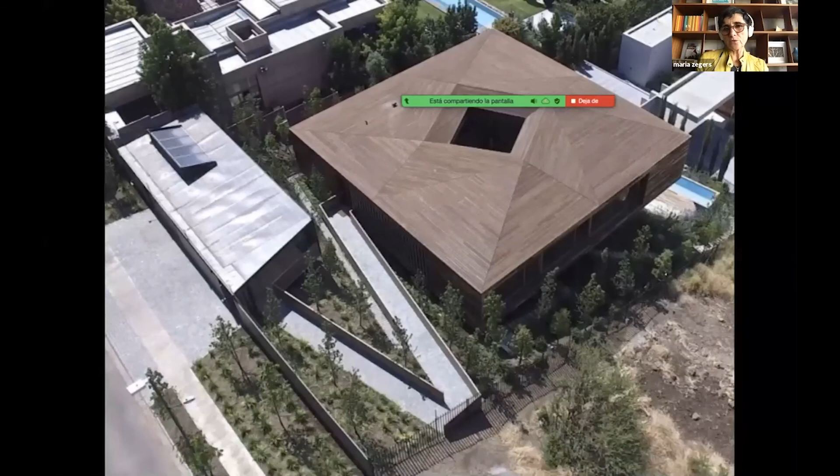The entrance, again looking towards the other end, and the way that you enter. And this is the roof, and a little video to show what happens with the space.

And for finishing, I'm going to show one last project that is in the region of the rivers. And no, it's two more projects. This one is another family lot that is in the south.

Here I thought about the water and how I could make a cover for the water and protect from the water. So we studied the water molecule to make the house, but it's also like this tent that is inspiring this, no? Like everybody makes a little tent with a pole and just a plastic cover. So our plastic cover was this oxidized steel piece that was done in the place with carpentry, done one by one.

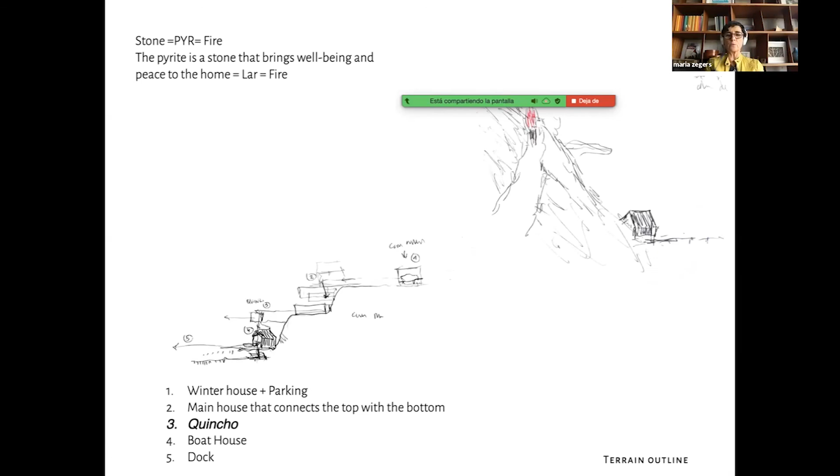And so we did this house in the south that I'm going to go through very fast. The concept is about fire again, but also about the stone pyrite, and it's again a family lot, and it is designed through the sacred geometry of fire. And how the crystal of pyrite, I don't know if you say it like that in English, it grows, and all the crystal system.

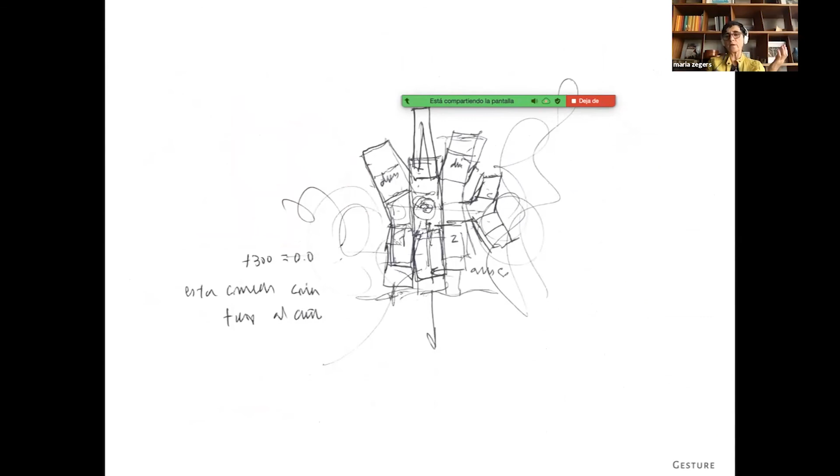And here comes this house that is very similar to the one that I showed, but has the challenge that is the site. It has a precipice - how do you say precipicio in English?

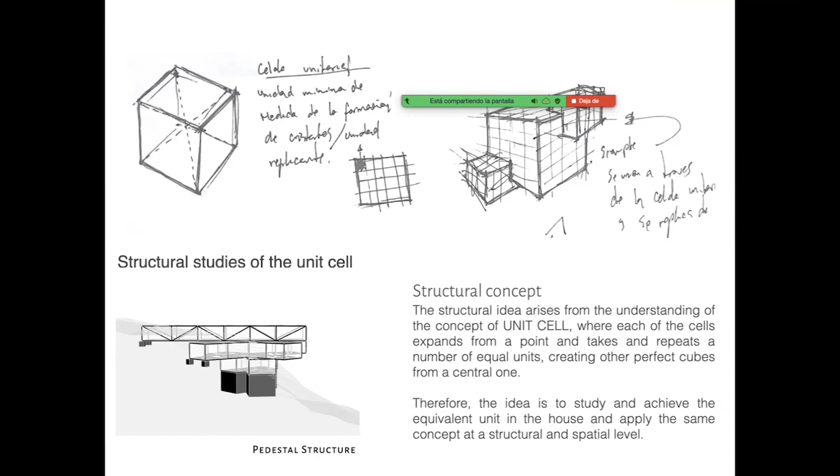It's like a ravine, but not quite—more like a cliff of 12-meter height. So we had to hang the house on these 12 meters. I decided I wanted to make it in CLT, because I thought that was going to be the best way to do it.

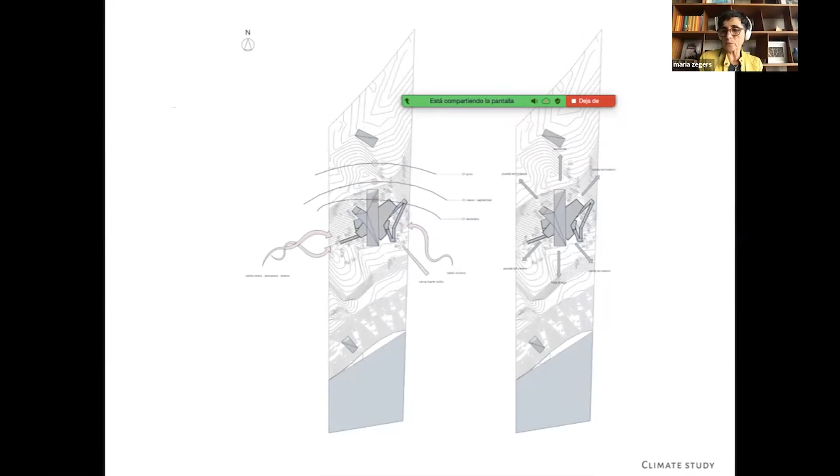This is the structure of the CLT. We did it, and then we made all the development with the climate in mind, because it's really a bad site—beautiful, but bad with lighting, air, and wind conditions. We don't have any flat part, just 12 meters of a cliff. So we're hanging this project over the cliff. It's a super big challenge.

So the geometry starts with these studies of fire and sacred geometry. All the stairs are in the middle, connecting all the parts of the house. And there is the house.

The thing is that for doing it in CLT, we couldn't do all these big windows. So we had to go back again and do it in a little more conventional timber work. But the next one, we are doing entirely in CLT. So we are learning. Of course, this couldn't be hanging as it is—we have to put some pillars.

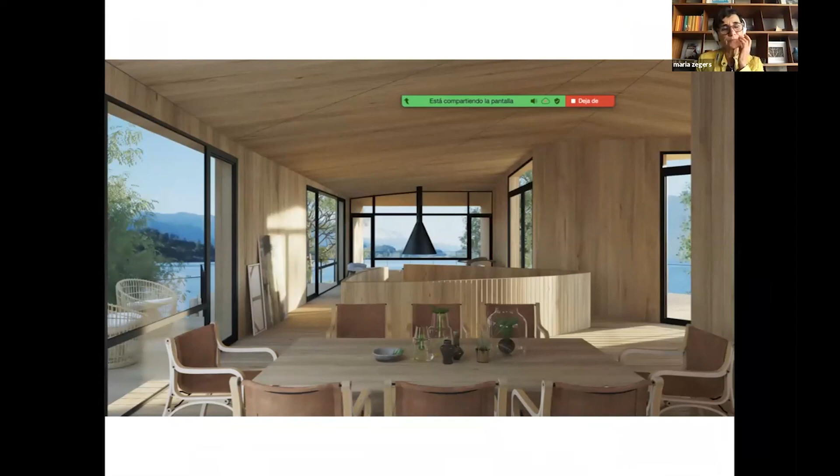And then studying the inside, like if you want—this is the space with exotic timber like pine, or this is with native timber. So understanding how we want the space.

We're also building this timber house in a very deep part in the south, that you get to after 1.5 hours by boat—it's really super remote. So the architectural challenge here is how you make the enterprise able to build this in these conditions. So CLT and timber is the way to go.